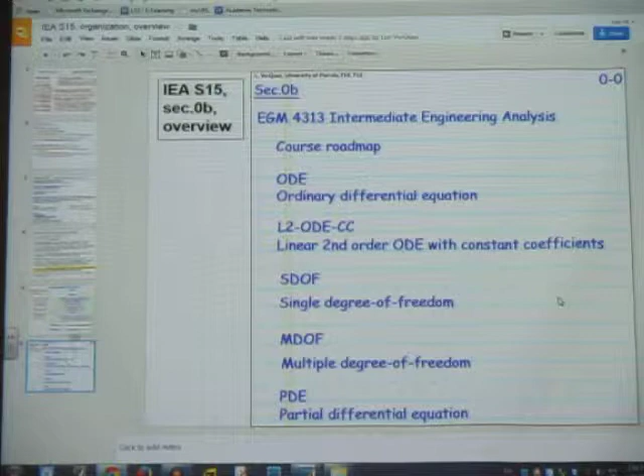And like I said, you have the video recorded here, and also my handwritten notes. Okay, so let's click here. You remember there was a problem, right? There was a problem with the stylus. It's now fixed, but when I went back, I rewrote this.

So you see, this is an advantage of the way I function. When I write on the computer tablet, I often go back and annotate, and you can look at my handwritten notes from last semester. I don't write a lot in class, basically formulas, or even if I wrote on the board, it's the same thing.

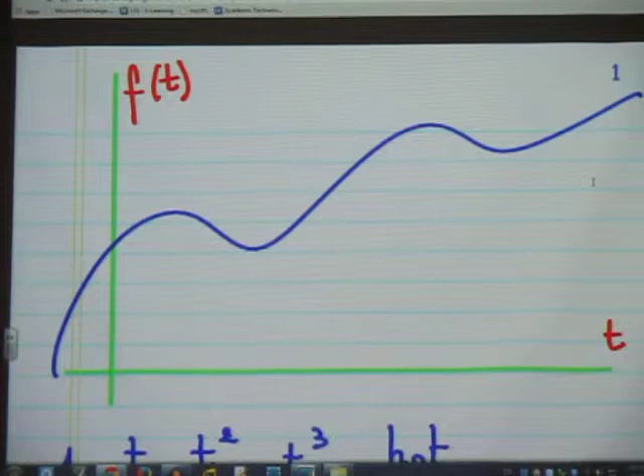But when I went back, I added what I said in class, which students do not take notes on, and that's half of the important information. So taking notes is not perfect, cannot be perfect, right? But let me do the job, and you can get everything that I said. That's even better, while in the meantime you focus on understanding the material, discussing, that's much better. Asking questions that would improve the understanding rather than just the futile transfer of notes from my notes into your notes. Why do that? I already did the work.

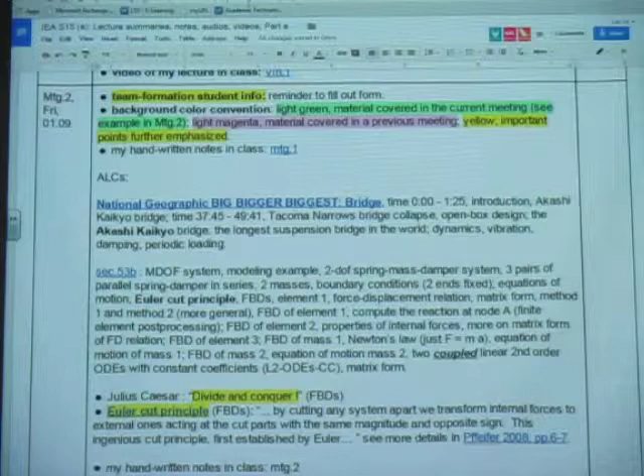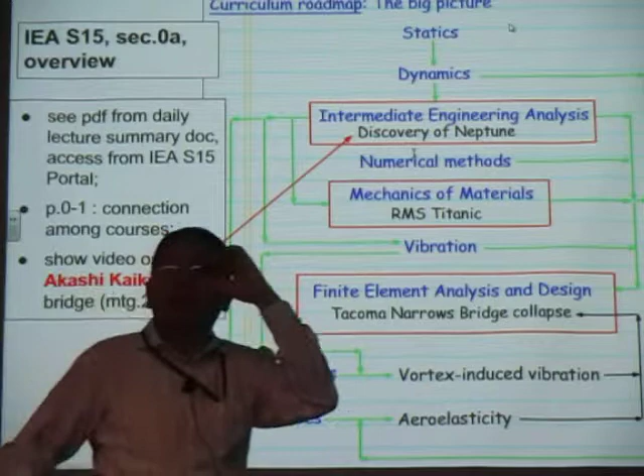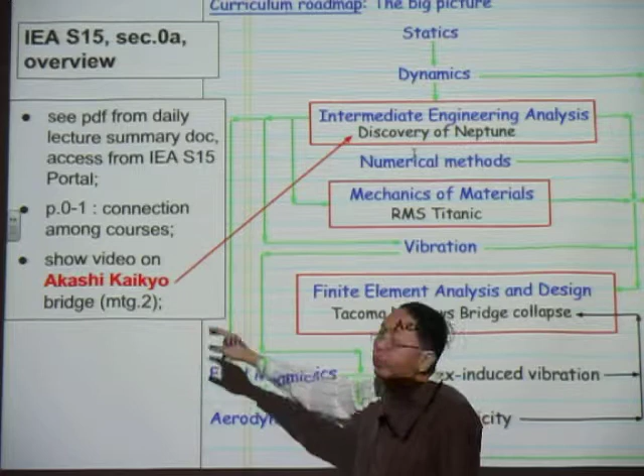So let's start with this motivation. This is, if you recall, I use a real-world problem to motivate learning the method in class, and there's the discovery of Neptune. But what I'd like to show today is the Akashi-Kaikyo Bridge, the longest suspension bridge in the world, to motivate the first half of the semester on solving systems of second order ODEs—vibration, essentially.

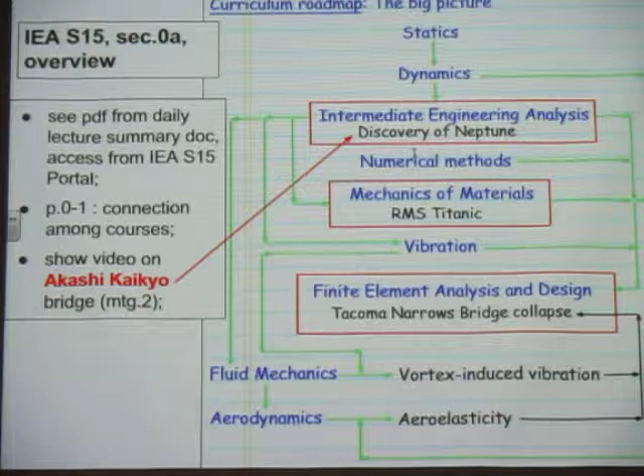All right, let's look at that. I have the link here. I don't want to show the whole video, it's very long, so I just want to pick out certain portions of the introduction. The introduction would be from time 0 to 1 minute 25, and then I skip to the end.

I'd like to keep in mind the following—let me boldface the important keywords here. What you want to keep in mind would be dynamics, vibration, damping, periodic loading. All of these would be concepts that would be presented, and how to solve problems that would model these mechanical phenomena.

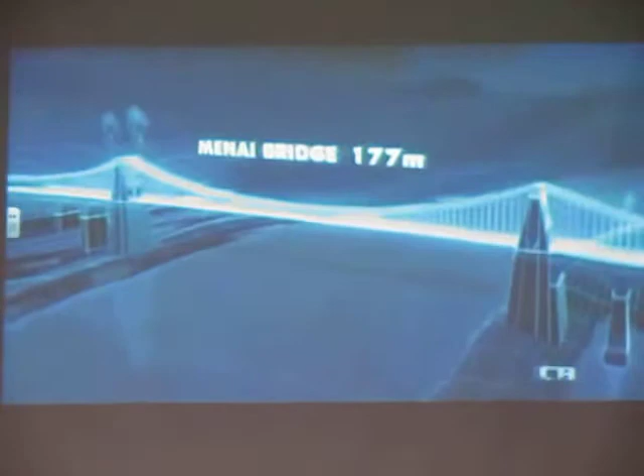Is the world's longest suspension bridge. It spans a waterway 4 kilometers wide and is designed to withstand powerful typhoons, tsunamis, and earthquakes. It is the pinnacle of bridge engineering. The Akashi Bridge owes its success to 7 key inventions found in these 7 landmark bridges. At the heart of each bridge lies a major technological innovation that allowed engineers to span ever wider chasms. One by one, traveling up the scale, we'll reveal the incredible stories behind these structures and the inventions that allowed them to grow ever longer—7 ingenious leaps forward that enabled bridges to evolve from big to bigger into the world's biggest.

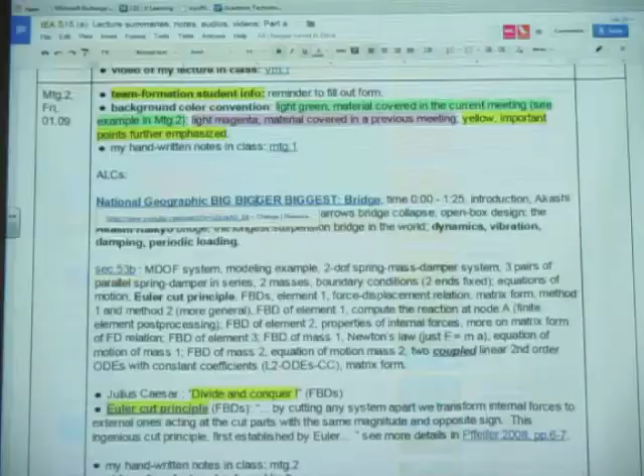So now I skip to—this is the link, you can look at this video, very nice, but I don't want to show the whole video as I mentioned. So I skip to time 37:45 to 49, 37:45.

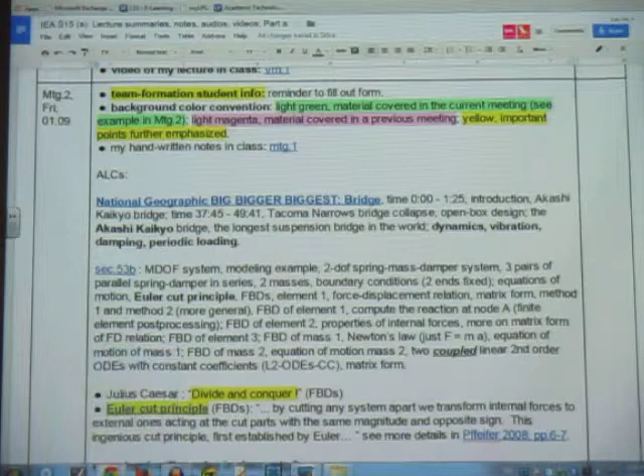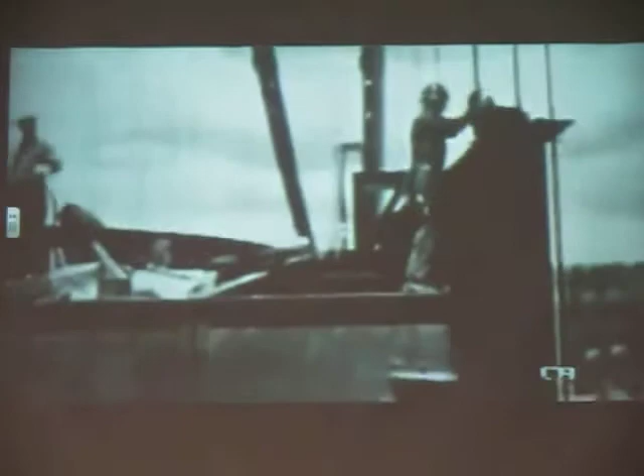They must now be designed to resist a particularly destructive force of nature: wind. In 1940, a new bridge opens across the Tacoma Narrows in Washington state, but it has a fatal flaw. In a modest wind, the deck begins to move up and down, then it starts to twist, finally the bridge collapses. Engineers now understand why the structure failed. Aerodynamic instability has to do with the shape of the structure that the wind encounters as it blows across the bridge. A bridge deck with a flat side presents an obstacle to the wind. When a crosswind hits it, the flow of air is disturbed, causing eddies to form above and below the deck. These produce areas of varying pressure that either suck the deck up or push it down. Once the deck moves, the bridge flexes against it. The wind and the structure's movement actually interact with each other—it becomes a self-exciting phenomenon. It will build up the amplitude to the point where it will wreck itself, just as the Tacoma Narrows did. One solution is to introduce a more streamlined profile to the sides of the deck to slice through the wind and channel it harmlessly over and under the roadway.

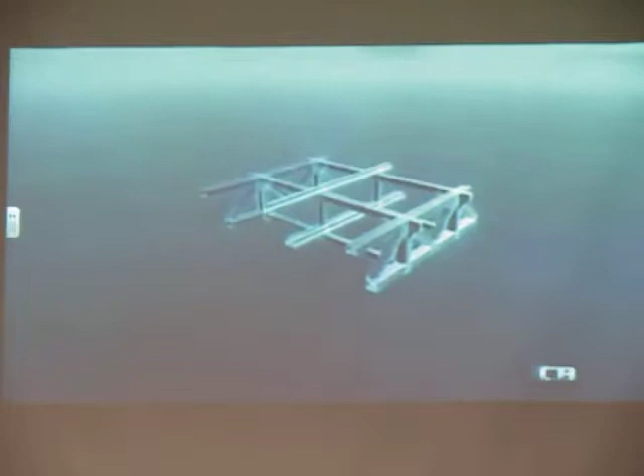The most effective way to do this is to enclose the decks in a great box. But they know a 2-kilometer long steel box would be too heavy for the bridge's cables. Instead, they take thin steel bars and assemble them into a lightweight skeletal unit. 75 of these lock together to form a massive open latticework of steel, allowing the wind to flow unimpeded through the structure.

This unique design resists the powerful Atlantic storms and supports 12 lanes of traffic. Its twin decks carry almost 200,000 vehicles a day from Brooklyn and Queens to Staten Island and on to the main Atlantic highway system. It's a remarkable achievement.

This bridge supports 70% more load than the Golden Gate Bridge, which of course was its nearest equivalent at the time. When completed in 1964, the Verrazano Narrows Bridge becomes the longest and heaviest suspension bridge in the world.

The bridge marks the gateway to New York Harbor and stands today as one of the city's landmark structures.

Verrazano Narrows Bridge, I think, is the culmination of a great era of American bridge building. And of course, the biggest and the greatest of them all.

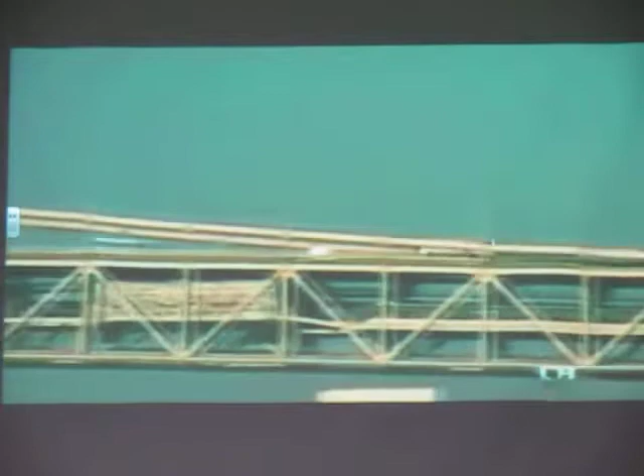The design is so good that over 30 years later, the Japanese used the same open box concept to stiffen the deck of their Akashi Bridge. I'm standing at the moment within the stiffening girder of the bridge. You can see it's primarily triangular in geometry, a lattice work of steel members. It's also very light, and the whole makes up a box structure, which is very difficult to twist.

But the Akashi Bridge faces another challenge. It stands in a notorious typhoon alley.

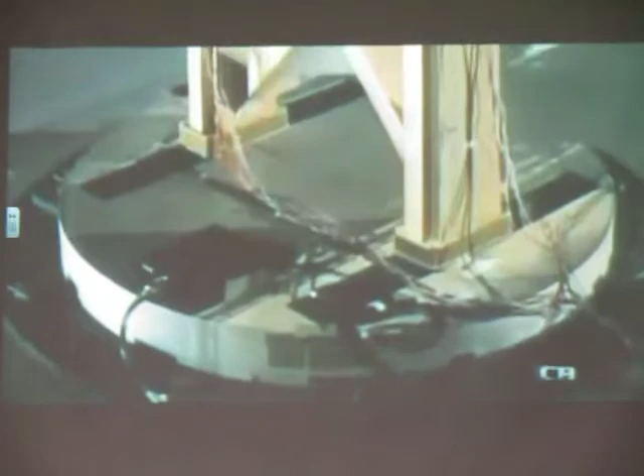Japanese engineers must ensure the Akashi Bridge can withstand the worst nature can throw at it. So they build one of the world's biggest wind tunnels to explore its design limits. Even at 100th scale, the model of the bridge measures 40 meters. Huge fans generate the equivalent of 300 km/h winds, so the engineers can test and refine their design.

By using wind tunnel tests, the engineers were able to devise a structure which would both minimize the load generated by the wind and also be stiff enough to resist any loads which the wind would cause.

The wind tunnel tests suggest they need to deflect the wind as well as stiffen against it. So they insert a massive steel beam just below the roadway. When a strong crosswind hits the beam, it gets redirected upward through a grill in the deck, neutralizing its destructive effect.

The 1,900-meter steel spine works with the reinforced deck to ensure the Akashi Bridge can withstand typhoon winds of up to 300 kilometers an hour.

The Verrazzano's wind-defying capabilities enable bigger bridges to safely straddle increasingly exposed crossings. But to build the world's biggest suspension bridge, engineers must defeat a force of nature powerful enough to shake the structure's very foundations.

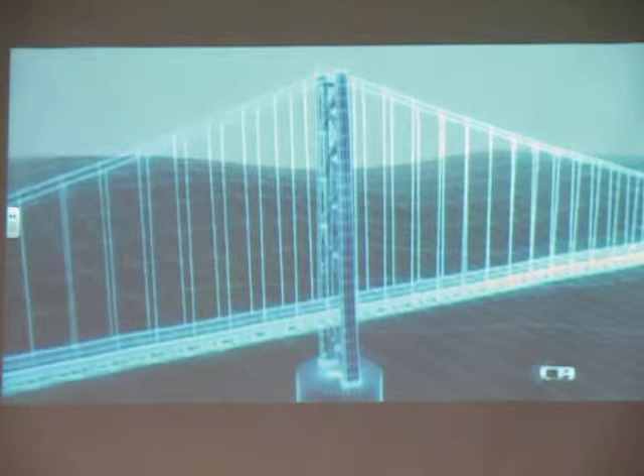The first line of defense against an earthquake is the bridge towers themselves. They're built from steel to make them flexible. If a tremor hits, the steel towers can move with the earth to absorb the shock.

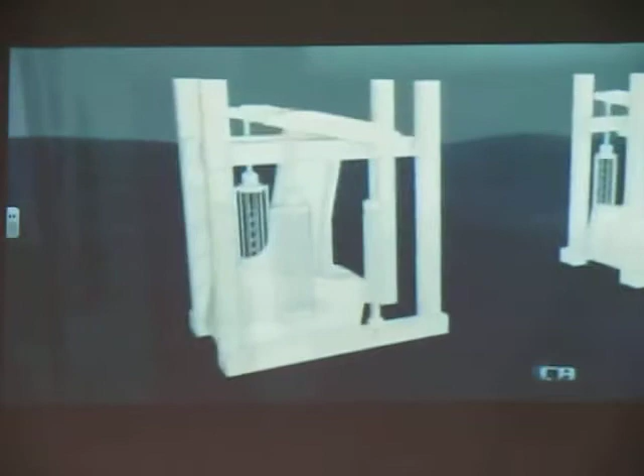And inside each tower lies a second layer of protection: 20 huge pendulums called dampeners. Each 10-ton dampener hangs from a frame. If a tremor causes the tower to lurch one way, the huge hydraulic dampeners swing in the opposite direction, counteract the shift, and prevent the tower from falling over.

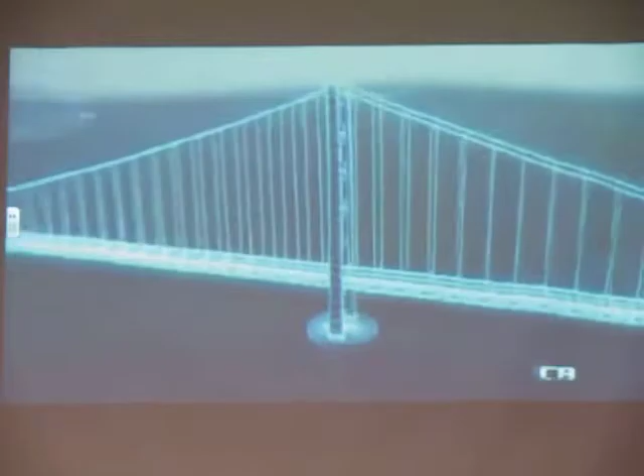Now in these two models, we can compare the effect of fitting a damper. The tower on the left is a normal tower with no damper. The one on the right has a damper fitted to the top. We can see how much each one sways by observing the arrows at the back. It becomes clear from this model test that the tower without the damper on the left is swaying more than the tower with the damper on the right.

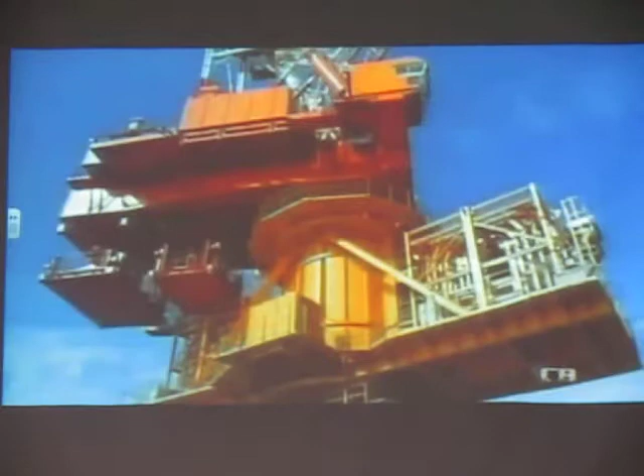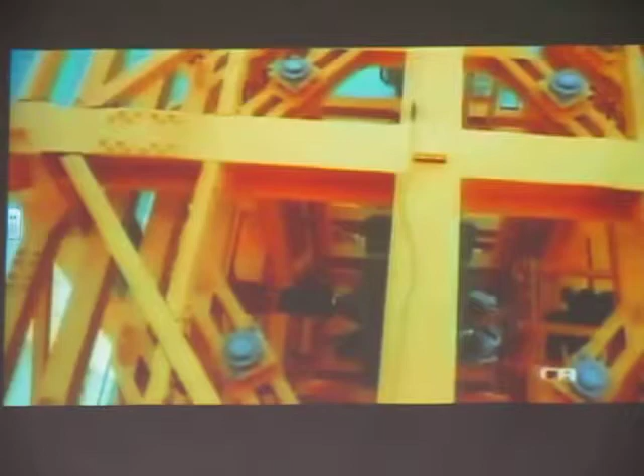To test the dampeners in the absence of an earthquake, engineers resort to a novel approach. They carefully choreograph 100 workers to sway in perfect harmony to mimic a tremor. During this man-made quake, the dampeners react to keep the tower steady.

But on January the 17th, 1995, nature tests the technology for real. A magnitude 7 earthquake devastates Kobe, the city on the Akashi Bridge's north bank. It kills over 6,000 people and destroys more than 100,000 buildings. But the Akashi Bridge survives, saved by its dampeners.

It still bears the scar of that fateful day. The earthquake opens a fault line in the seabed directly under the bridge. This causes the ground and bridge towers to shift apart and stretches the bridge by over a meter. Engineers must fill this space with extra decking to join it to the shoreline. As a result of this earthquake, the longest bridge in the world became a little bit longer.

That's really all I want to show. You see very beautiful work that survived important, strong earthquakes. Remember when the workers do like this? That's periodic excitation, right? Damping.

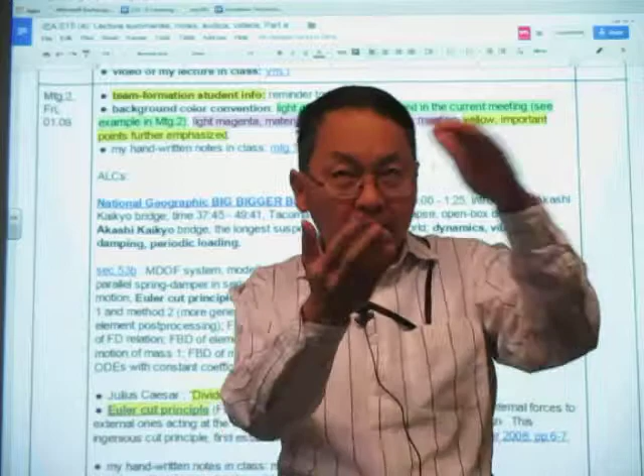So all of these concepts you will learn in the first half of the semester. And like I said, the techniques that you learn apply to real-world industrial problems that can scale up to millions of degrees of freedom, meaning a system coupled with millions of equations. Not just 2 equations that we use. But like I said, we use 2 equations because one has to learn to walk before one can run. Right? So that's the reason.

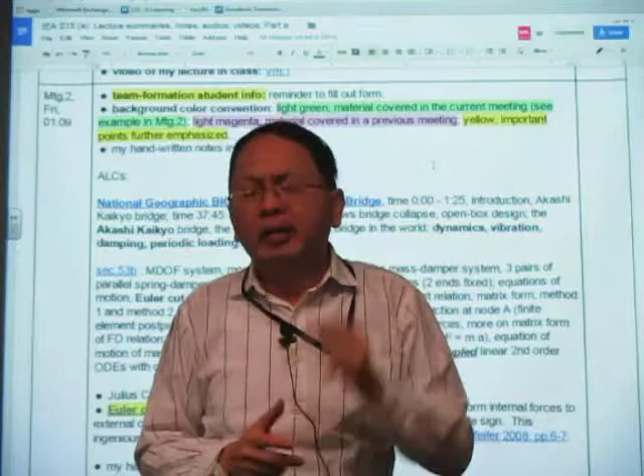But let me mention the following. When I said try not to take notes or take few notes in class, I do watch the students, and I noticed that some were not so convinced, and I really thank that student for making that body language. But that also reminds me to tell the class the following. I never said to learn math or mechanics that one does not write at all. No, I never said that. What I meant is, don't do that in class.

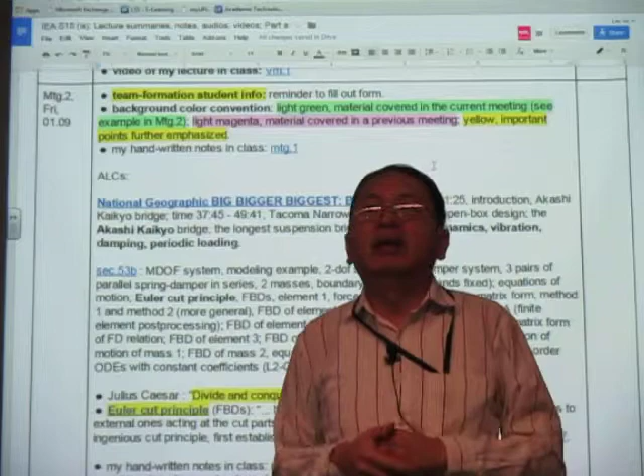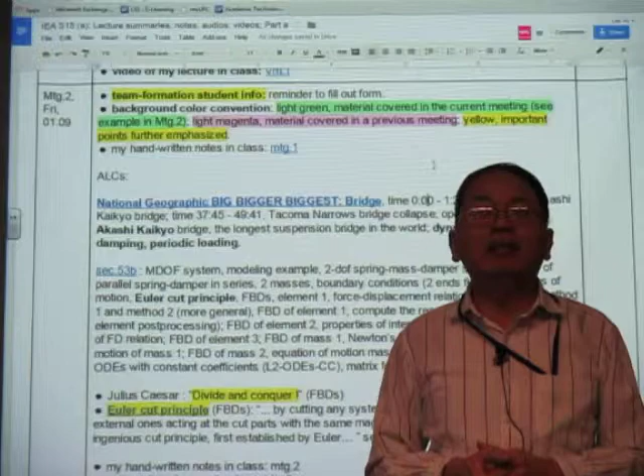Do that at home. If you want to rewrite my notes, which I do advise, please do so at your own time, when you want, where you want, however long you want to take. You need to do that, right? You cannot learn math or mechanics without writing, no. And what are the opportunities to do that? When you solve the problems, or better yet, right after class, okay? So I hope that with that, we all agree that you do need writing, but try not to do it in class because you want to focus on the content.

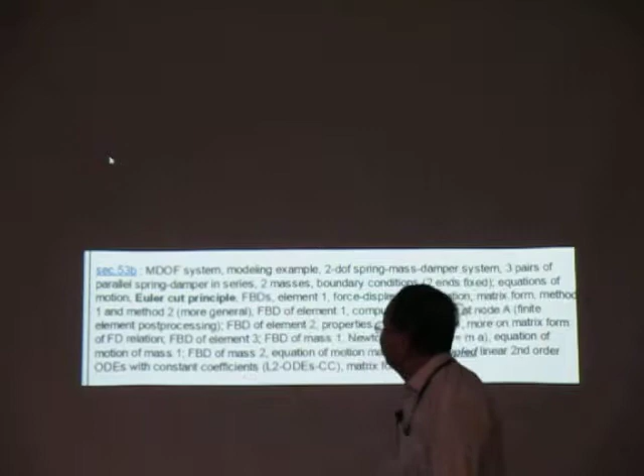Okay, so here's the link to the first set of lecture notes that I want to discuss. Okay, so here you see what I wrote here is, let me bring up the mouse. Okay, so here is the complete content of section 53B. Don't worry about the number, because these are the numbers that I use for different topics.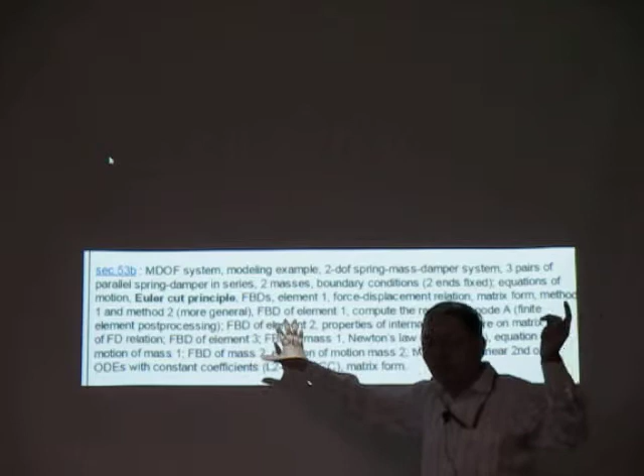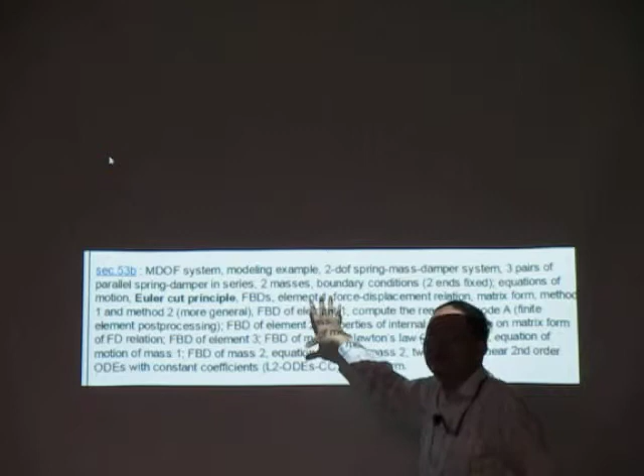If you compare to the daily lecture summary of last semester, spring 2014, you see that it would be much shorter at the beginning, because I was developing the notes and I add more and more. So this is like the state of the lecture summary at the end of the semester, or after I have completed explaining section 53B. Okay, so that's just to give you a heads up.

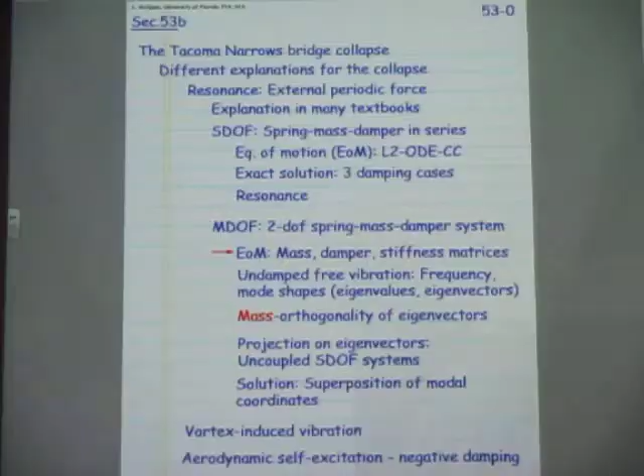Yeah, I can write on it. So I use a combination of the Smart Ink that I can write on the PDF, but without keeping the result. You know, this is just to make some points.

And for example, you have seen the Tacoma Narrows Bridge collapse in the video, and so what we will focus on now is directly the multiple degrees of freedom system with 2 degrees of freedom. It's a spring mass and damper system that you were motivated through the Akashi Kaikyo bridge.

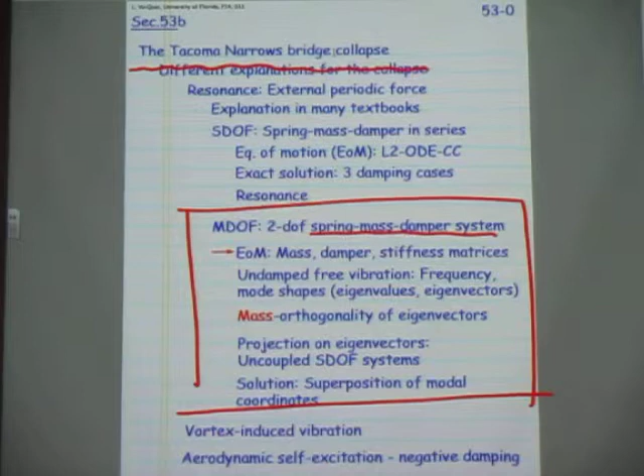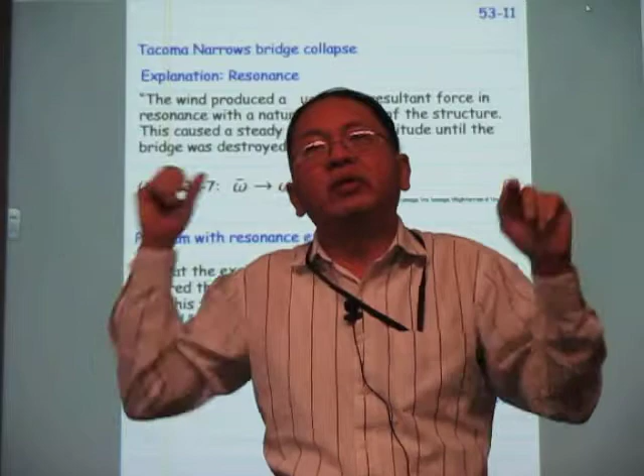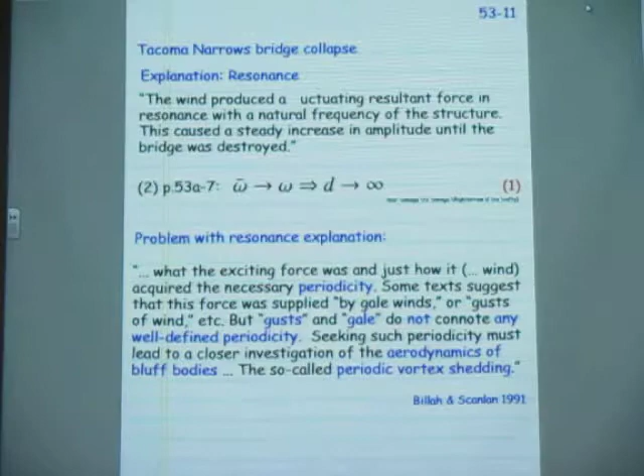I may come back to this if needed later, but here I would like to focus and mention a few words: the collapse of the Tacoma Narrows Bridge is not due to resonance. That's an error that is often made. If you look on the web, sometimes they mention this, even in many textbooks. So don't believe everything on the web. Certain textbooks even did not provide a complete or correct explanation. But I don't have time to get into this here - I teach it in more detail in my finite element course.

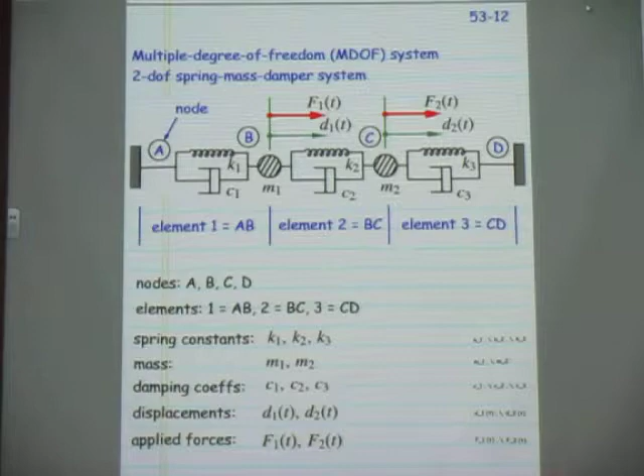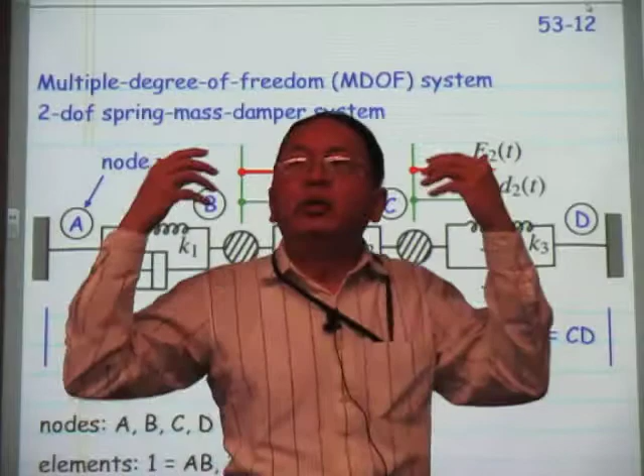So now I'd like to present this. You can do a mental experiment yourself - how long does it take to draw this figure on the board and then transfer it to your notes? And how about colors? So I hope that would convince you.

Okay, so 2 degrees of freedom. What is a degree of freedom? Essentially, the displacement of a mass. So here you have 2 masses. Each mass has a displacement represented by this green arrow, denoted by D sub 1. D is mnemonic for displacement, and 1 is because that's the first displacement degree of freedom associated with mass M1. For mass M2, you have the displacement degree of freedom D2. And T is the independent variable.

T is the independent variable representing time, and this is just to mention that these are functions in time. Now, on mass M1 and M2, you can also have applied force. Remember the workers, when they move back and forth, that's the application of periodic loading. So here, the applied force, cap F1 and cap F2, can also be time dependent. A periodic function is an example of a time dependent function - it's a particular case.

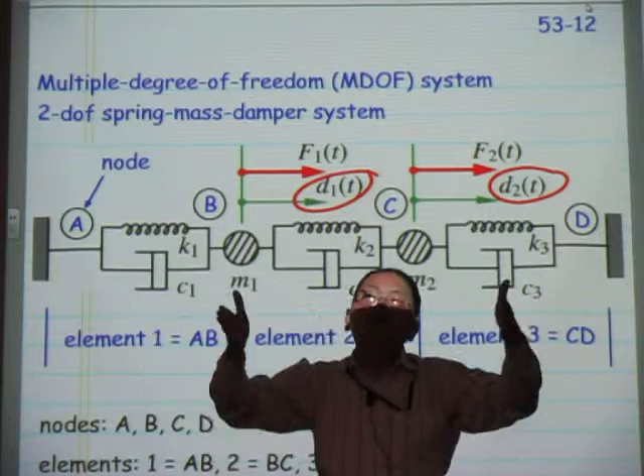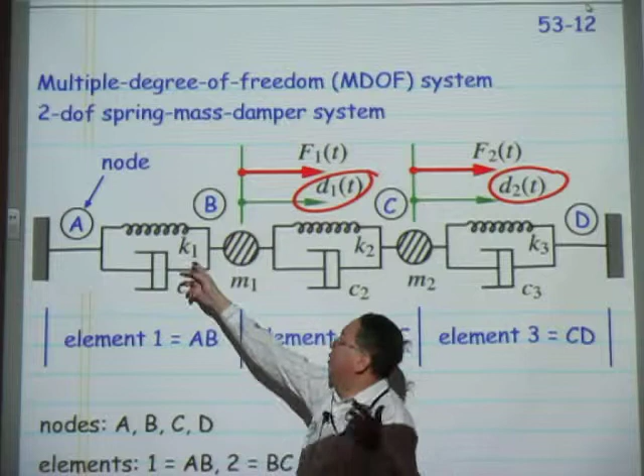Yes, please - what are C1, C2, and C3 again? C1, C2, and C3 are the damping coefficients - they are the equivalent of the spring constant. This is the damping coefficient, basically representing the property of the viscous damper. Everyone knows the meaning of the spring.

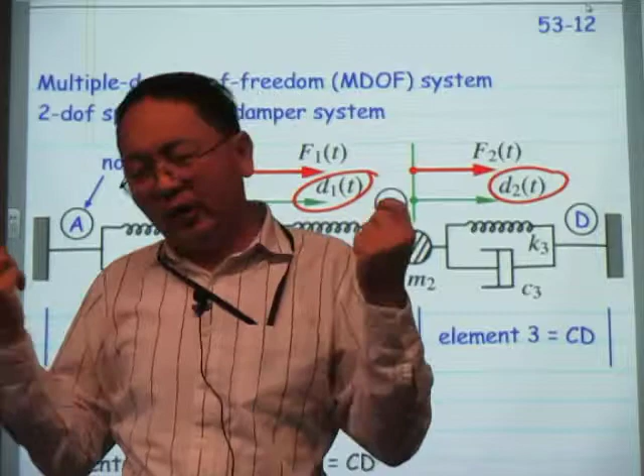Well, I say everyone, but let's ask the critical thinking question in the review. Could someone in the class explain how do you express or define the spring constant? What is your name? Kai? So Kai, can you mention something that would define the meaning of the spring constant? What's the resistance to a change in length? Yeah, so in terms of equation, how do you write it? Let's say the force, and then you have displacement - so force equals K times displacement. Very good. So this is Kai - let me quickly note this down so you have it in your notes.

So essentially what Kai said is F equals K, and if we call D the displacement, then F equals KD, right? So that's F sub K here, or you can also write F sub S, with S representing the spring.

But how about F sub C for the damper? Anyone in the class? I think it prevents it from oscillating. If you have like some sort of spring and it's going back and forth, it slows it down so it stops moving back and forth. What is your name? Derek.

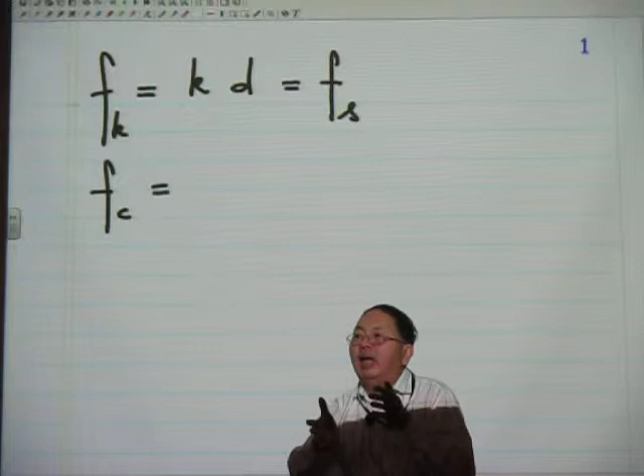Derek, my question is, how do you define the damping coefficient? It should be very similar to the definition of the spring constant. And this is a viscous damper.

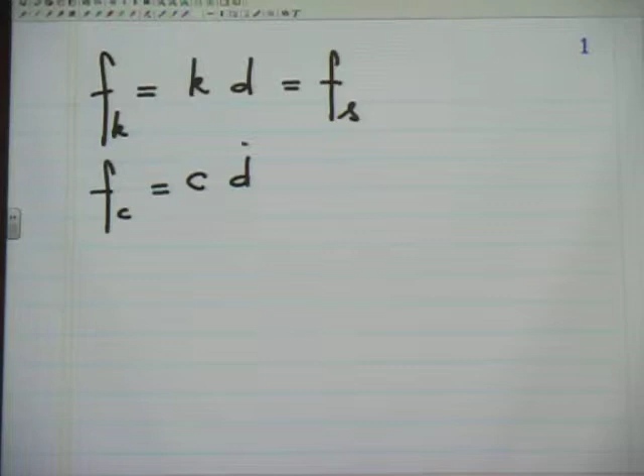So the definition is that you have C times the velocity. This is the velocity. D dot means the derivative of d with respect to time t. Let me write the definition. And this is an unfortunate choice of notation, because d we use as displacement, but d is also used in the Leibniz notation for derivative.

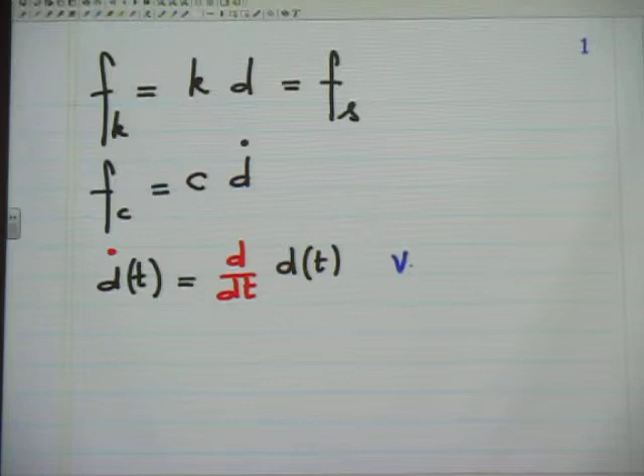So d dot, let me use a different color. That's another advantage of using this tool, is that I can use different colors. So this is velocity, whereas D here is displacement. For now I'll just quickly write it like this.

By the way, this need not be constant, okay? It can be a function of time. Let me emphasize, and you see I can change it easily. So here I put time in to emphasize that all of this is really time-dependent quantities, not constant. And even d dot is also a function of time.

Thank you, 5 minutes. Okay, so let's try to move forward.

So I have introduced all of the elements there, and let's see, let me clear the thing here.

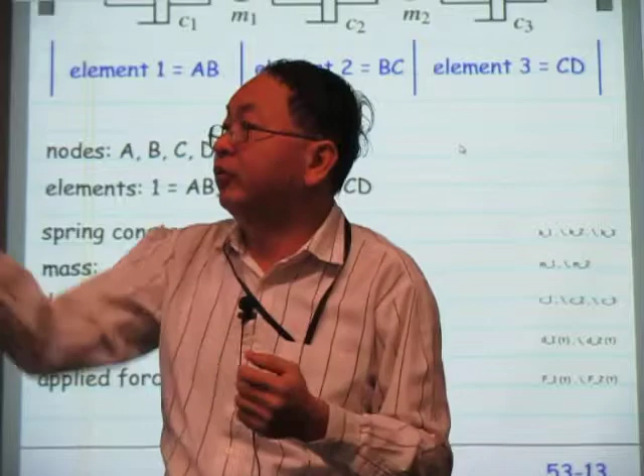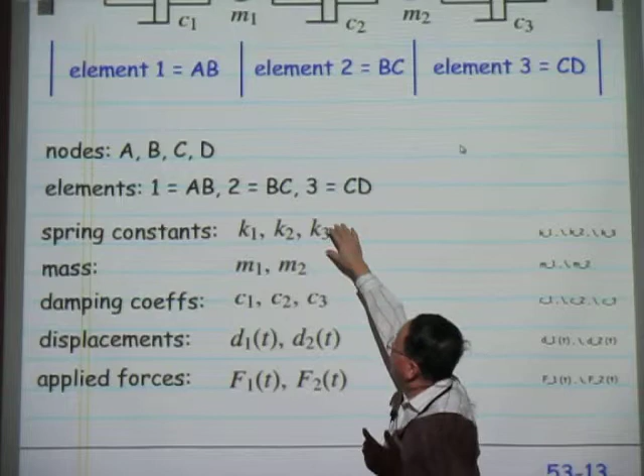So all of these quantities have been introduced and defined: the nodes A, B, C, D, the elements 1, 2, 3, between what nodes and what nodes, the spring constants K1, K2, K3, the masses M1, M2, the damping coefficients C1, C2, C3. By the way, the spring constants, damping coefficients, and masses are constant. In this example, they are not time varying.

Can someone think of some mechanical system that has varying mass? Something with a mass that is a function of time. Space shuttle? Yeah, or a rocket, right? Because fuel would be expended, so it gets lighter and lighter as it goes on. We're not doing that, that's more advanced.

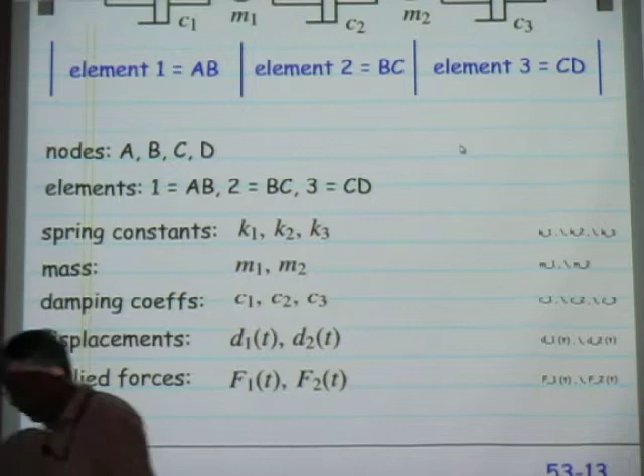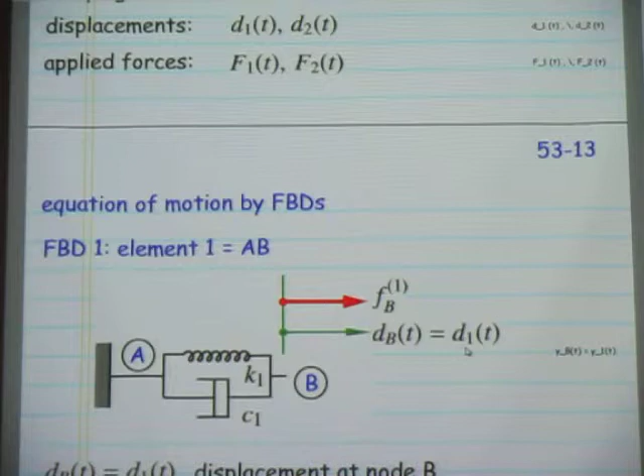Okay, and then the applied forces. So how much time do I have here? 3 minutes. And please remind me, I need to remember before I forget.

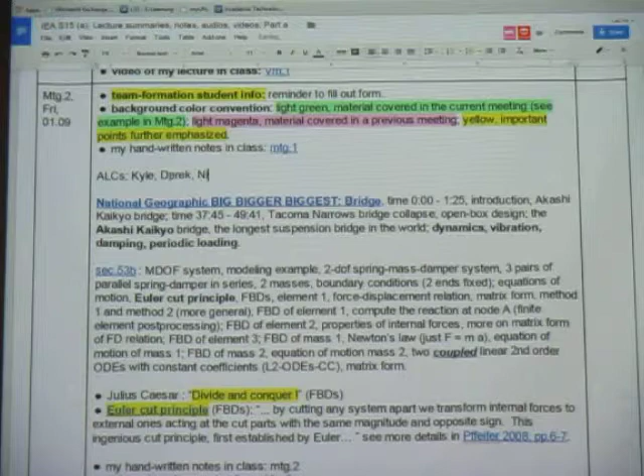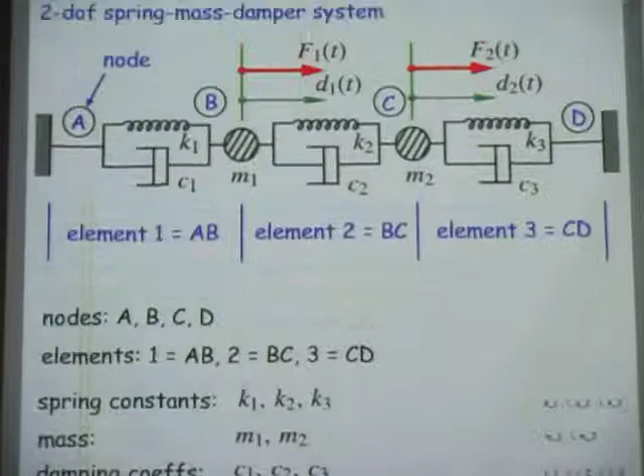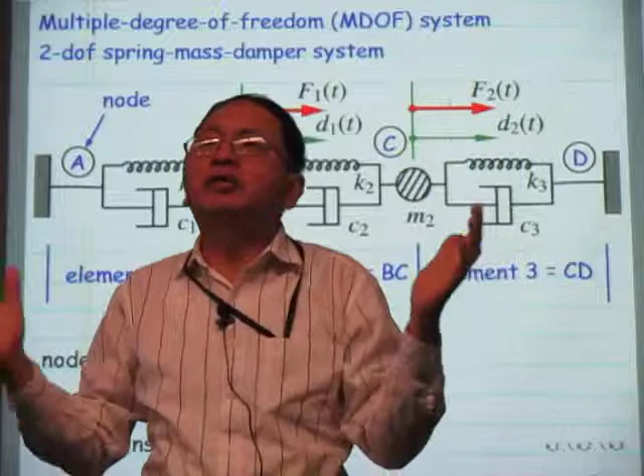Okay, let's see what's installed. So the next thing, how do you analyze a system? And before we quit, let's go back to statics, forget dynamics for now. In statics, you are given a structure, how do you analyze the structure? Free body diagrams, very good.

What is your name? Maria. Now you need to have... It's Maria, but with an E. Yeah, we can talk after that.

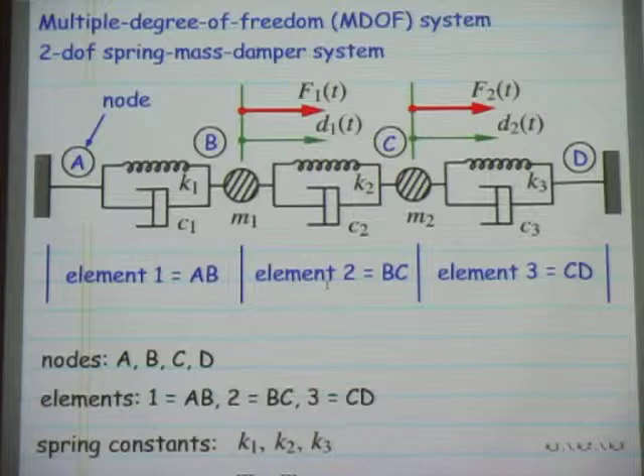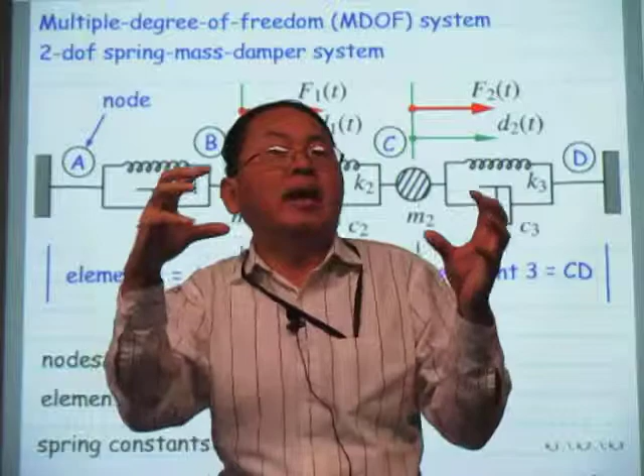Please go, but here's what I want you to prepare mentally before the next class. In statics, when you want to analyze a system, not just free body diagram of the whole system, but also subsystems, right? You divide into subsystems, and then each subsystem has to be in equilibrium. So keep that in mind for next time.